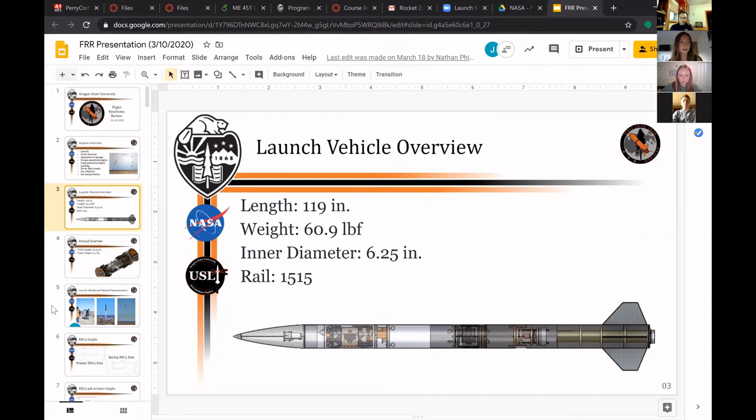Our payload is a rover. It weighs 6½ pounds, I think that's with its retention system, which is shown in this picture as well. Skip all of those numbers.

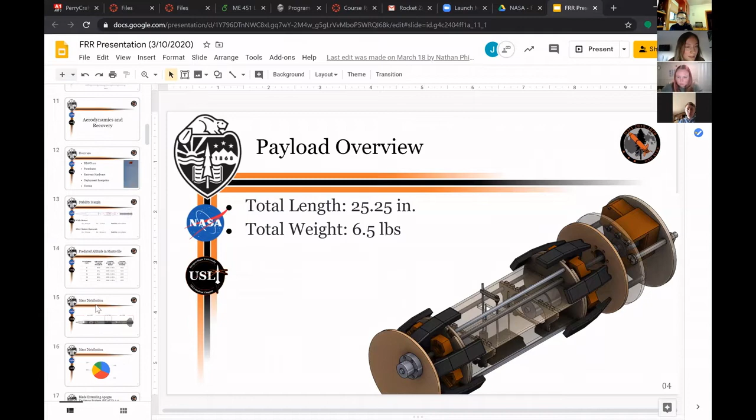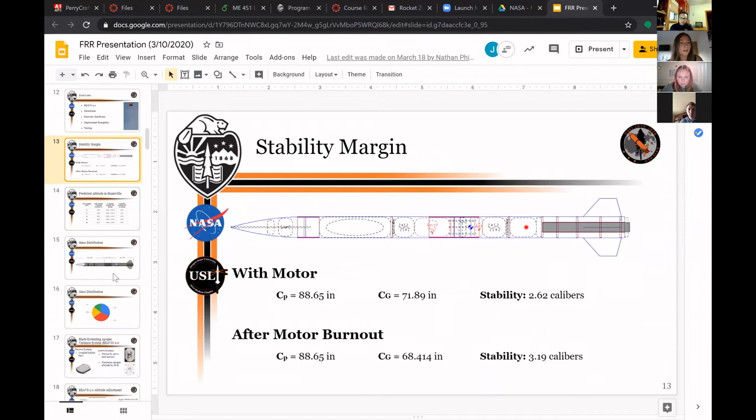So then I'll go over aero and recovery. Our stability is 2.62, and then it increases to 3.19 with our mass distribution.

Our mass distribution is like this: we have our nose cone, which holds our avionics. Right behind the nose cone, we have our payload. Right behind our payload, we have our main parachute. Then we have our coupler with our altimeters. After the coupler, we have our drogue parachute. After that, we have our air brake system, and then after that, our motor.

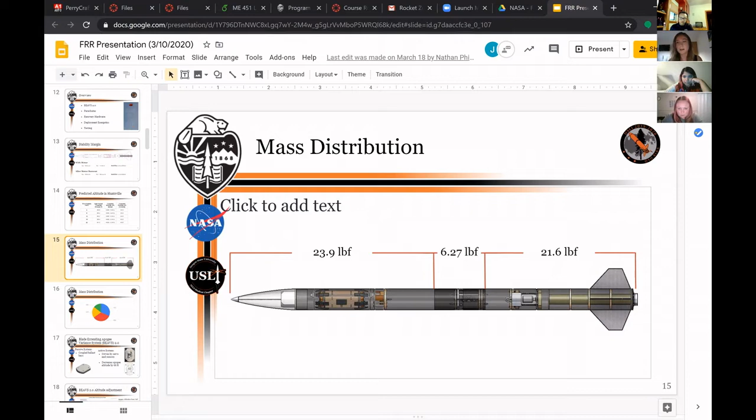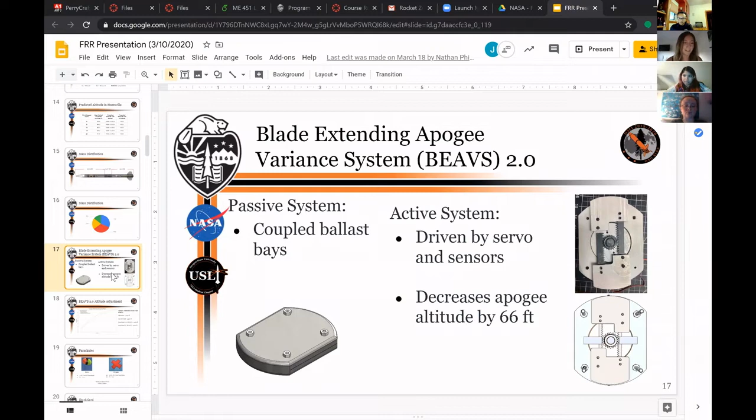Our air brake system was a rack and pinion design driven by a servo. It reads active altitude and acceleration data, and uses that to actively calculate our predicted altitude, and will extend the blades if it thinks it's more than 66 feet over 4,000, which is how it was intended to fly. We never got to fly active though, unfortunately.

Our parachutes: we have a 12-foot main toroidal parachute and a 18-inch elliptical drogue parachute. Our recovery harness for our main parachute is like this, and it's pretty much the same for our drogue. Everything's tethered together, so we have quick links attached to bulkheads in the fore body tube and in the coupler, with a zipper or tether in between connecting them to the eye bolts on the bulkheads. Then we tie off another shock cord and connect the parachute to that. It's pretty much the same for the drogue, just with a bit larger shock cord for the tether.

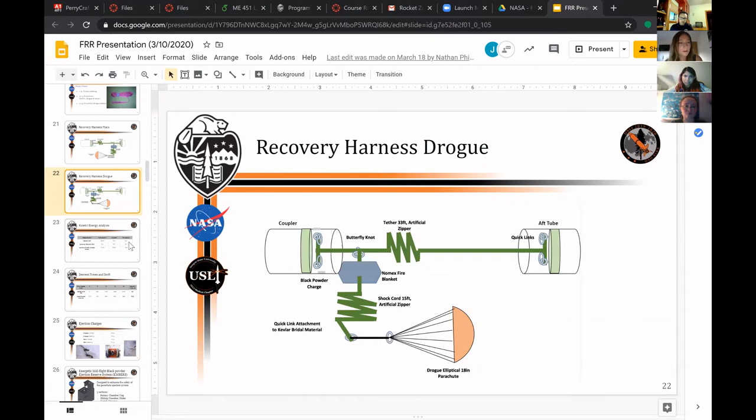One interesting system we're adding for competition that unfortunately never flew active either: Amy designed a backup black powder charge retention system. Our backup charges were oftentimes, after our main charge would eject our parachutes, coming out of the airframe in the air and then cauterizing our parachute. So this system would retain our secondary black powder charge within the rocket and detonate that charge within the airframe no matter what, so it wasn't dangling in the air and the charge wasn't cauterizing our parachutes.

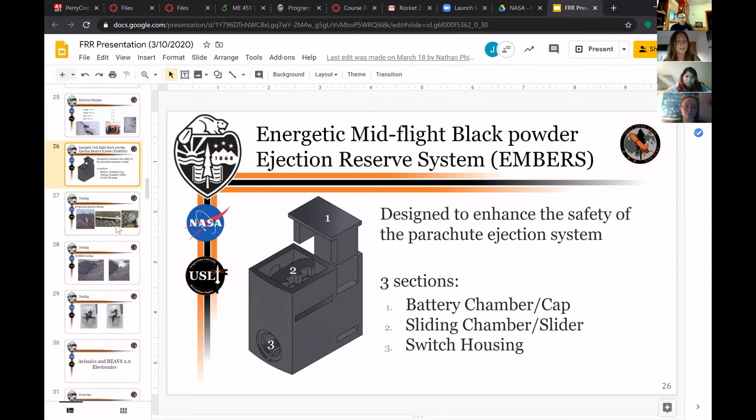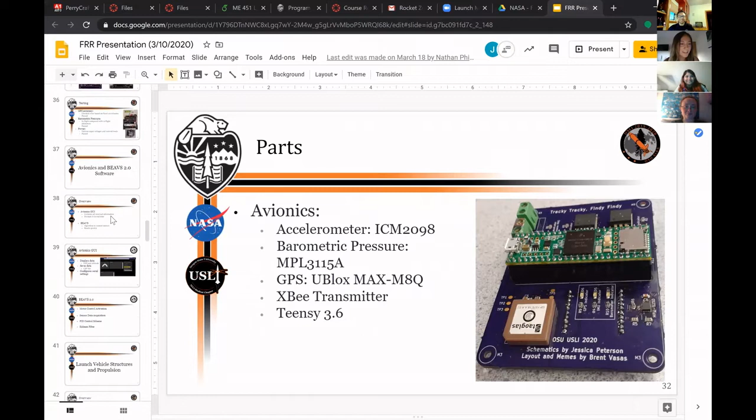I guess that's pretty much it for aero and recovery. Do you guys want to hear about avionics? I don't really know how much I can talk on that, that's more of our EEs. Okay, I don't have much to say about avionics, so we will move on to structures and propulsion.

All right, I think I unmuted myself. Yeah, all right, cool. So structures and propulsion, can we go to the next slide? I'm Nathan, by the way, I did a lot of the structures stuff, helped out with that.

So an overview, we have a nose cone. Inside our nose cone is our main tracking for the launch of the rocket, independent of our recovery electronics. We just had tracking, GPS, and data taking, so we could record altitude and stuff. Right after that, in the fore section, we have our rover bay, where our rover is retained, connected to a single bulkhead in the middle of our fore section airframe tube. Right after that is the main parachute bay.

Then we have a coupler that's tethering our fore and aft sections together. Inside the coupler are our main recovery electronics, which will eject our main and drogue parachute. Right after that, in the aft section, is our drogue parachute compartment, then our blade extending apogee variance system compartment, and then the motor bay and the fins.

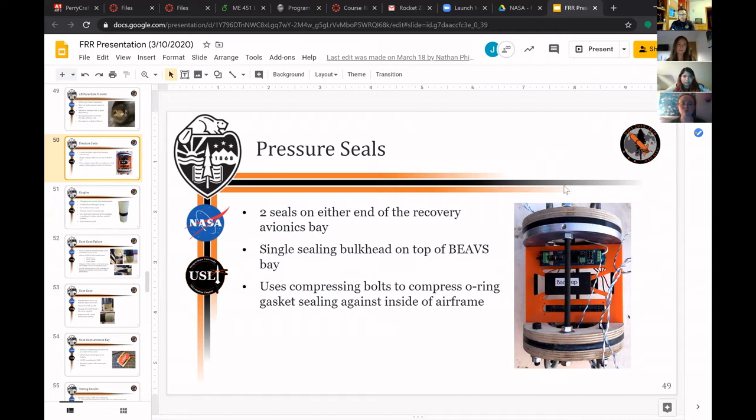Next slide, go to the coupler. The coupler itself is a fiberglass construction. We made it out of unidirectional fiberglass and laid it up inside an extra piece of airframe we had so that it fit perfectly inside the airframe.

We originally were going to go with carbon fiber, but there were issues with the original coupler because the fiberglass mold and the carbon fiber coupler have different rates of expansion and contraction when heated to cure, so they got stuck inside each other. We had to sand out the carbon fiber coupler for several hours just to get it out of the mold. So we ended up just doing one out of fiberglass because we could make the fiberglass strong enough, and there was no reason to destroy our mold if we had to make another one.

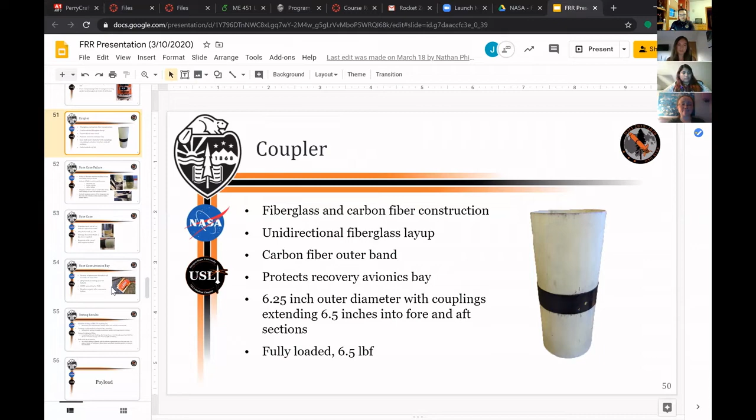As for our nose cone, I don't know if we have any good pictures. Oh, there's some pictures of damage. So our nose cone, because we had a weird diameter of 6.25 inches, we took a very large 7.5 inch, I think it was commercially made nose cone, because we didn't want to have to make our own nose cone, cut it down, and then laid up a coupler inside of that out of fiberglass, which worked pretty well until our first test launch, when it broke free of the airframe and then fell 500 feet onto the ground.

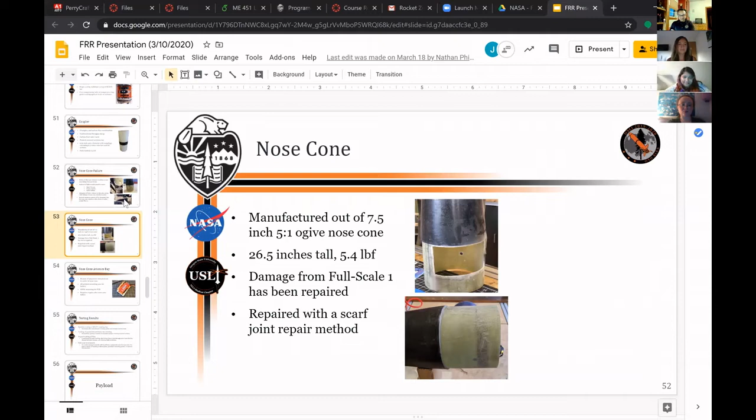And so if you go up to the picture right above that, you can see the damage before we cut it out. Yeah, so we had these big sections where we had some ballast that impacted the sidewall, and so we had to cut out that entire section and patch that, which is ready to be flown but has not been flown yet. That's all I have as far as structure slides go. Yeah, there's not much else.

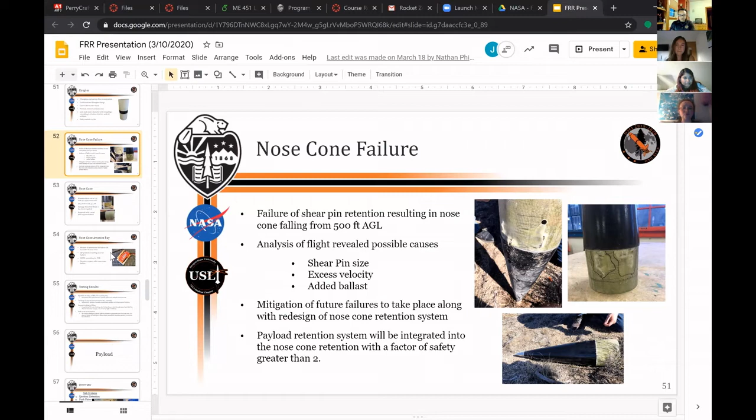All right, payload. Okay, so hey guys, I'm John. Hopefully you guys can hear me. I think I muted it. Yeah, go on to the next slide. We have a couple pictures here that we can kind of go over. So this is the payload.

We had 4 mechanicals on it, and we kind of broke it into 5 parts: the ejection and retention system, the chassis, which is pretty much the rover. Sorry, take a step back. So what we decided to do is we tried to use a rover to do the ground mission. Shown there in the middle, you can kind of see the rover that we decided to go with. It has wheels that kind of expand out. Jordan will touch upon that a little bit when we get to those slides. But essentially it collapses and then it can slide into the rocket. So it's a biaxial design, and that's what we were planning on using for the ground mission.

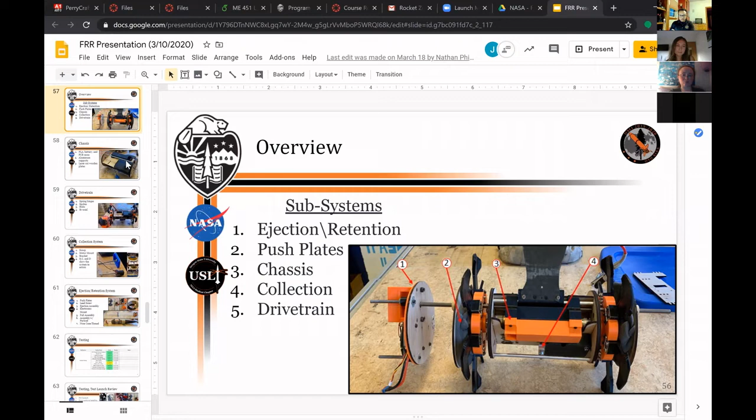And then it kind of slides onto this lead screw, which both ejects and retains it within the airframe. You can kind of see that there. If you have the pictures bigger than the one on mine, it's like arrow 1, 2, pointing out the ejection system. Next slide, Holly.

Thank you. So this is kind of the chassis, or what all the parts of the rover fasten onto. We decided to make it out of plywood because we had some laser cutters that we could use. So one of our freshmen that helped and volunteered actually cut a lot of these for us. And pretty much it's just plywood that's laser cut and kind of presses together with a couple aluminum rods that fasten it all and sandwich it together and hold it as a unit. And then there's some 3D printed parts that hold the electronics and the battery, which you can kind of see there in the black. What's the next slide?

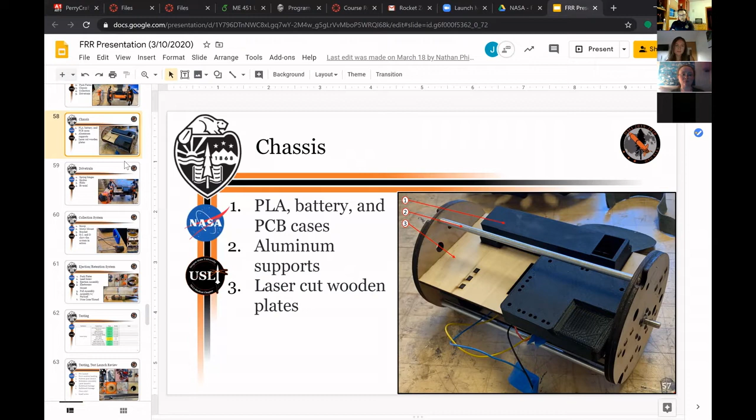Okay, so Jordan, you want to talk about your reinvention of the wheels that you went through? Sure. So these were designed in an attempt to give the rover more ground clearance so that it won't get high centered as it drove over any uneven terrain. Took full advantage of 3D printers because it was easy to do and strong enough for everything we wanted to do with it. The challenge was to make a wheel that could fold against the body and fit inside the rocket, but also be able to fold out and be usable instead of walking on stilts, having a wheel that was actually round.

So that's not quite the final design, but pretty close to it. You see the ends of the wheels have 2 radiuses on them, one for rolling and then one to fit against the rocket when folded up inside. Just regular spring hinges, so when it pops out of the rocket, it springs out, and then you kind of walk up onto the wheel and then roll from there. Tank drive, nothing really special there.

It has a skid plate made out of carbon fiber in the back, and that's self-explanatory. The couplers connect directly to the motors. We have pretty beefy motors that are secured very well to the chassis, so there really wasn't a concern about damaging the motors or, after some improvements, coming off. Made a couple modifications to the D shaft so the wheels wouldn't come off. But yeah, that's about it for that.

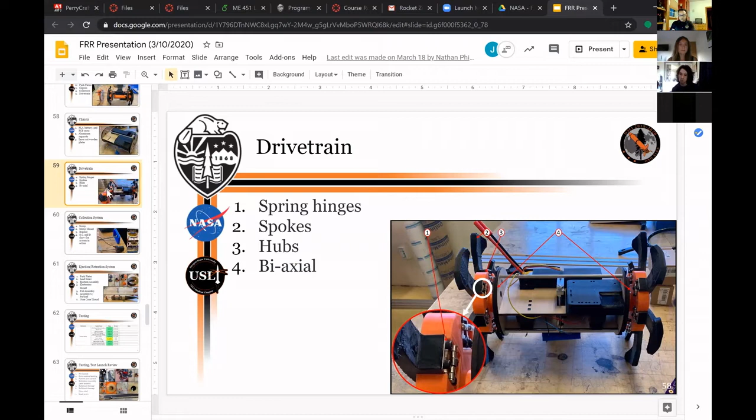We tested it with some plastic BBs that we had, and supposedly we're supposed to be going through the ground mission before the end of the year, but we'll see how that goes. But that's what the collection system is. Next slide.

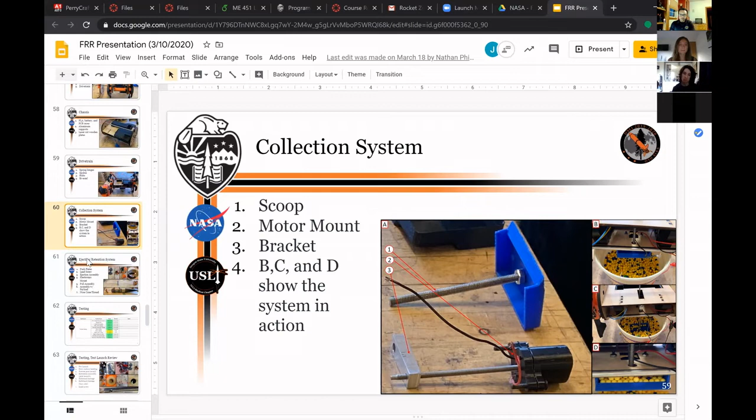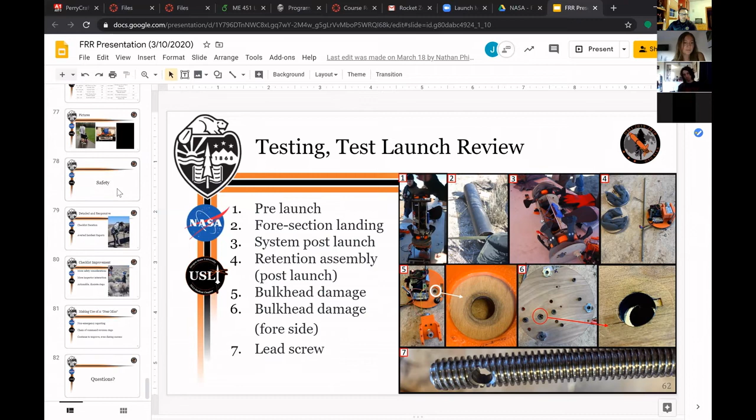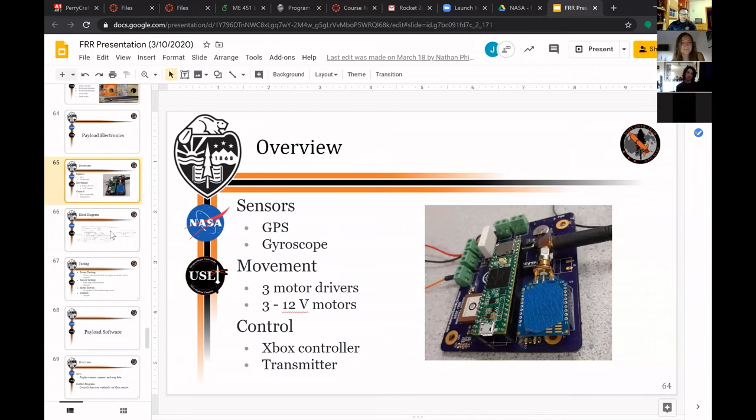I was wondering how the air brake... Sorry, Lucas, I just cut you off. No, go ahead. You're good.

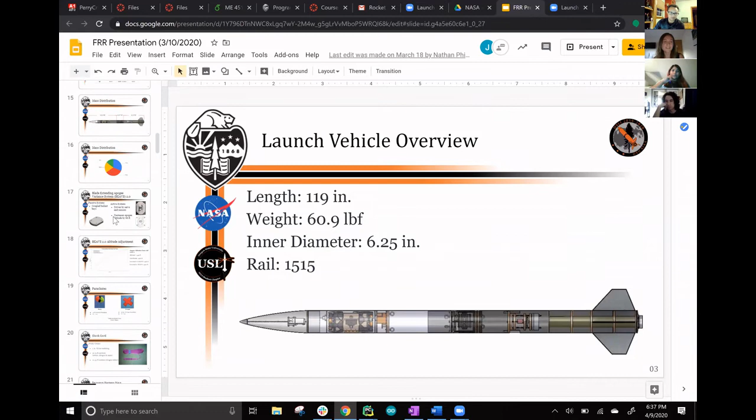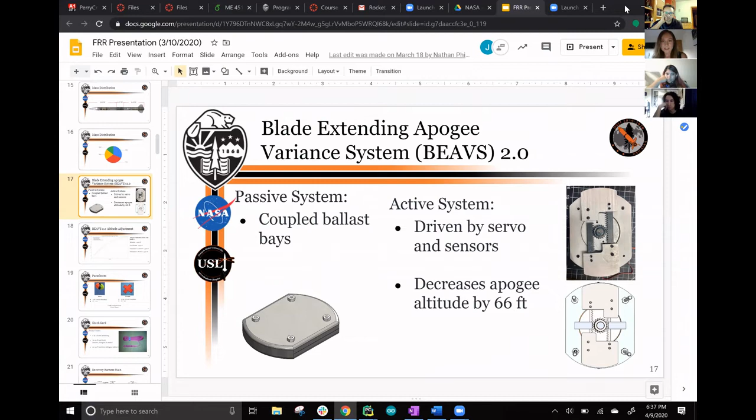I was wondering how the air brake system works, like the mechanical design of it. Yeah, so it's a rack and pinion design, and I guess it doesn't really show in this picture. Let me go to CDR. I think I have a better picture in CDR, but there's a servo that attaches to a plate with the gear on it, and yeah, it just drives the plate that the gear sits on. The gear is actually welded to it. So here's a better picture of the entire system.

So there's 4 wooden bulkheads. On the top, we have our ballast bay, because that's kind of part of what we called an apogee variance system. So that includes ballast and the active air brake system. And then in the middle, we have our blades. And then below that, we have the servo motor and the mess of electronics that go with it. So it has a LiPo battery, and then it has an acceleration and an altitude barometric pressure sensor. To answer your question, I have a video of it somewhere too.

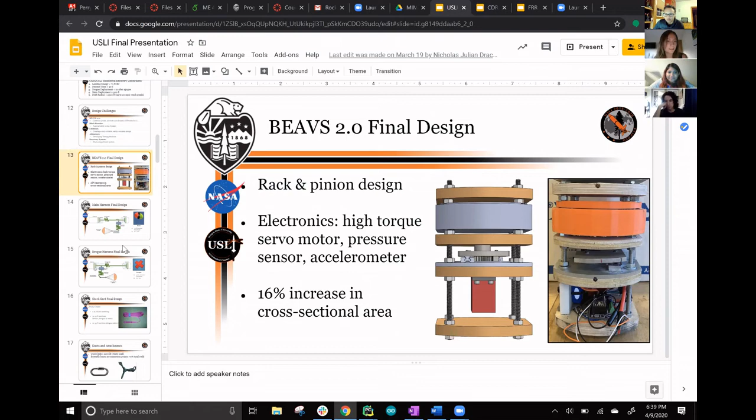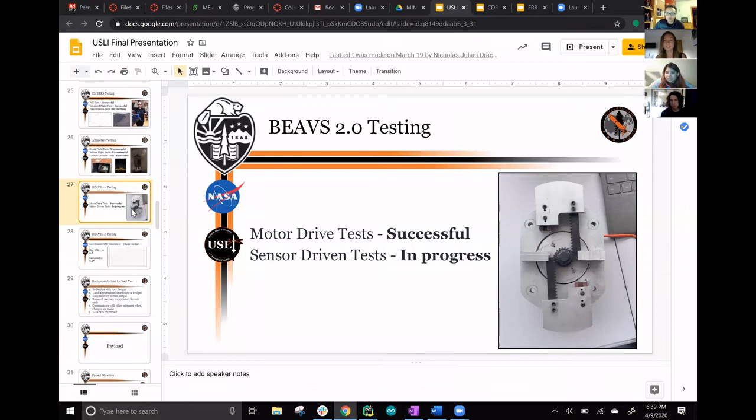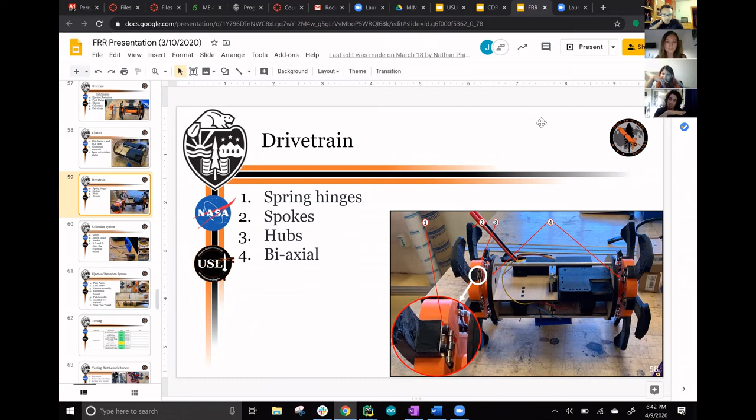Does the whole chassis system rotate with the rover as it moves, or does it stay upright? Just out of view is the tail that keeps it upright. So when it spins, there's a tail off to this side. Yeah, there's the tail. It's insanely blurred to bring down the image size, but it shows a little bit. The video is running forward and back, so it doesn't quite give. Oh, sorry. Okay, here we go. Yeah, that's cool.

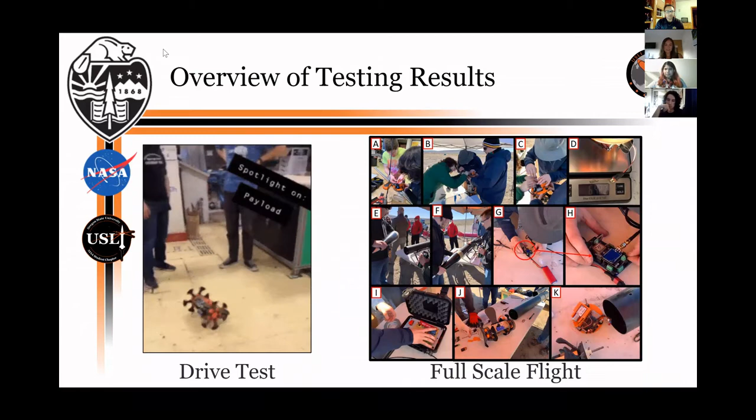What kind of microcontroller did you guys have on the rover? Honestly, I don't know. The electrical engineers made their own custom PCB that controlled it all, and then we had a legacy motor controller that they made last year to power the motors. Oh, that's pretty cool. So you guys were able to launch one time with the full scale rocket? Yeah, 1 full scale, and then I think 1 launch got canceled before we got out to our launch site, and then we had to scrap our last launch because it was snowing and the ceiling was too low.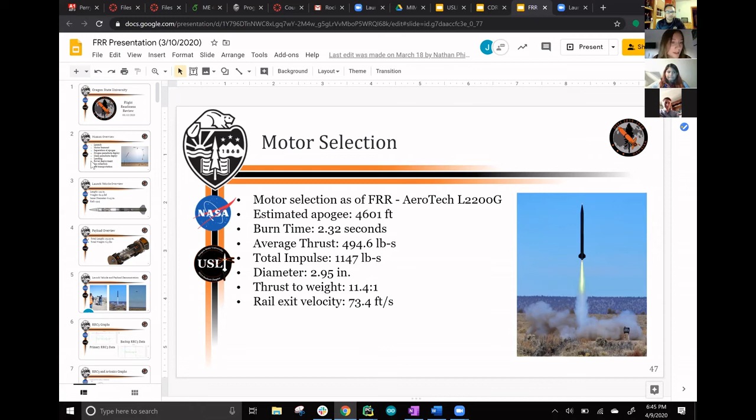So on your first test launch for the full scale, what was your apogee like? It was an average of 4,456 feet between our 2 altimeters and our custom avionics that our ECEs made. Okay. So why did you choose 4,000? I think we were just at a meeting over what altitude do we want, and someone said 4,000 and the rest were like, okay. But last year we chose 4,500, and all of our components were really heavy and we had to cut weight the entire time. So it's easier to shoot for a lower altitude and add weight than it is to cut weight. Good advice.

So can you talk a little bit about how your different teams work together? Like, would the vehicle team say, hey, payload, you guys are limited to 10 pounds or 20 pounds or whatever? Or is the payload team more setting that limit for itself? Since we are so small, we're basically all on every team. So I'm interested to hear how that worked with you guys since you're a lot larger. Does anyone want to answer that specifically?

Yeah, sure. So I feel like payload was kind of in the middle of it because everything is designed around the payload, like the rocket, the motor we use and the size of the rocket. So payload had a lot of people ask questions about what we're doing. How it turned out is we have weekly meetings with the entire team, and each team has a team lead. So there's some discussion between the payload team and other team leads about, hey, this is what we're planning on doing. This is how it's going to look. This is how the weight's going to be.

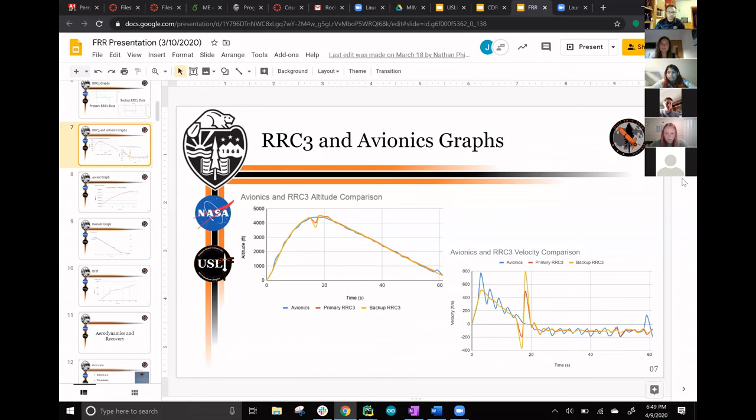First off, payload has a lot of cool pictures of it in our presentations, which is awesome. But the unique thing about it is the expandable wheels. It gives it a little bit of character because they're not locked in place, so when it drives around, they kind of collapse and expand. It drives a little bit more rugged, which is fun to watch. It's also orange and black and has a beaver tail, which is pretty sweet since we're the Beavers. That's kind of the unique aspect of the rover. I mean, it's still a rover, which is pretty standard. So I guess that's what I'll say about the payload.

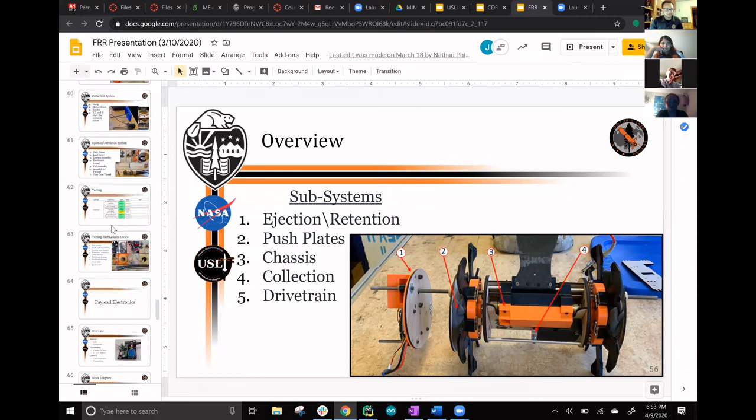Nathan, you want to talk about the rocket? Yeah, so I think the overall design is pretty simple. It makes it really easy to modify and change things when you need to, and there's so much in there that can just be pulled out and changed whenever you want. Like the mounting points for hardware can just be changed - you slide out the plate and slide a new one in and you're good to go. Just keeping it overall pretty simple and easy to work on, relatively.

I actually do have a question. So you guys manufacture a lot of your own parts. I was wondering if your team had always done that, because I think part of the difference is because we're so small, we buy most of our parts commercially. But I was wondering if you guys do it more for the experience of it, or if you see a really distinct advantage to doing it on your own.

So for a lot of the manufacturing stuff, I think there's a really good opportunity for experience making your own parts and learning what goes into making lightweight, strong components for an aero vehicle, versus just looking up a data sheet and buying them. When you sit down and start with a layup for a fin, thinking about what orientations you need, what weave you need, I think it's really helpful.

Another reason is we were able to get a lot of those materials very cheaply because we're lucky enough to have other teams using composites and machining. We had a machine shop right next to where we built the rocket, a composites lab 10 feet away, and an SAE team that works out of the same space. So we were actually able to borrow a lot of the materials, making it probably cheaper for us to manufacture everything ourselves, minus our airframe.